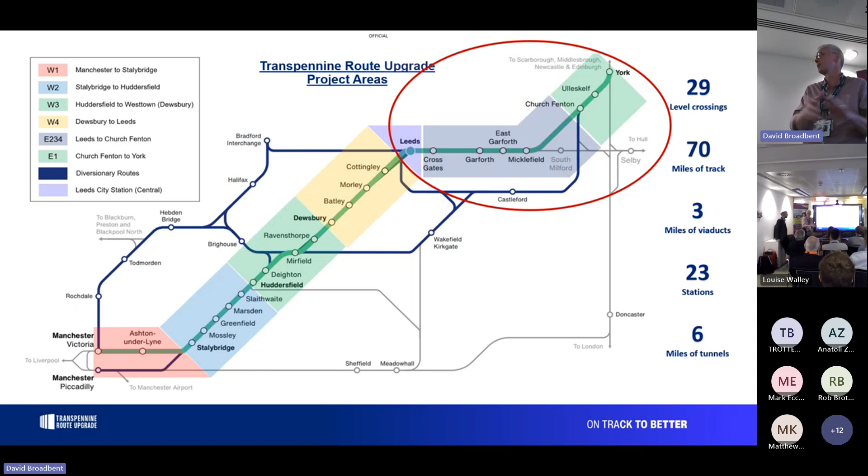So just breaking it down for us, from York we go through to Church Fenton, and we've broken that down into 4 or 5 phases. We've got the E1 scheme, which is the one we're currently on with, and it's coming to a close - basically a complete remodel from Colton Junction, full electrification all the way through to just shy of Church Fenton, and major track renewals, re-signalling, the full works of an enhancement project.

The next phase we're starting to commence, split into 3 phases, is between Church Fenton and Leeds Station itself, including a major remodel of the Neville Hill area. For those that remember, I think 1991 was probably when they did a major remodel of Leeds - a couple of people nodding. Well, that's come round again. We're going to try and remodel it and undertake an awful lot of enhancement work at Neville Hill itself.

So we've got 3 phases: E2, which is Leeds through to just beyond Neville Hill; E3, the main section, running all the way through to East Garforth; and E4 running through to Church Fenton itself. While we undertake these works over the next 4 to 5 years, we've undertaken diversionary works on the Castleford line, so on weekends we can divert trains through the Castleford area, allowing us to close the Micklefield to Leeds line most weekends, with a diversionary route in place.

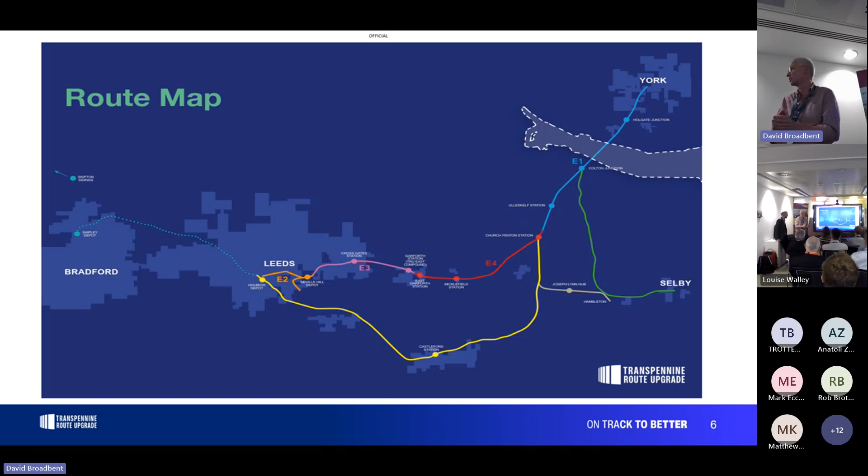Why are we doing it? We want to give more seats. We want to make it much easier for people to travel on the network. It's a difficult network to travel on at the moment, and people are experiencing that, unfortunately. We do say it's on track to better, so I don't always remember that it's on track to better when it's difficult.

More seats, trying to make it more reliable, more trains, faster journey times to get people there quicker, better station improvements. All the stations, they haven't had improvements over the past 15, 20, 30 years. So we're trying to improve the stations, make them more accessible, make it greener with full electrification, which is a key driver for the railway and for the economy as a whole. We want to become greener, get more people onto the railway so they feel safer, it's more comfortable, there's better Wi-Fi. It's what people want, and we want to put people onto the railway so they can make those journeys and get them off the roads.

I reckon if we can do this, we could save each day something like 1,000 lorry loads on the road network from a carbon perspective. So it's quite major what we want to do across the route, and it will reduce journey times by 5, 6, 7 minutes potentially overall, which I think is key for the people commuting and travelling. So there's a lot going on, and there's a lot to benefit in terms of what we're trying to do.

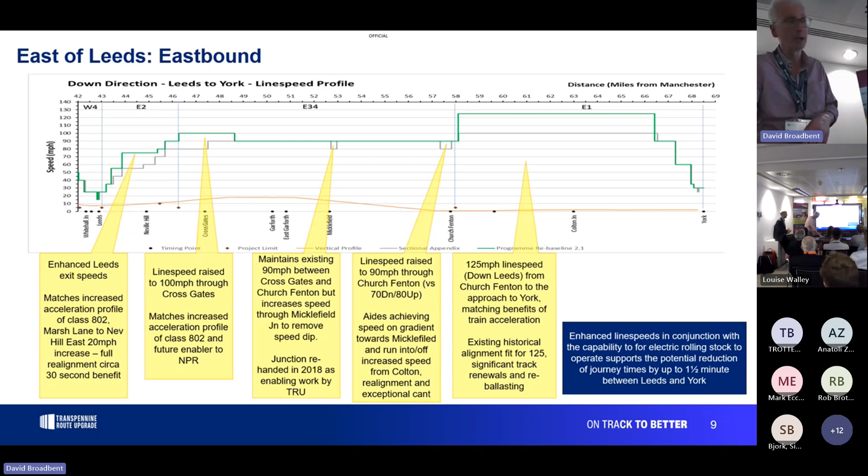From a York to Leeds perspective, there should be relatively about 2.5 to 3 minutes of improvement in journey time for us, going back the way we've been discussing. Neville Hill is a good example.

At the moment it's about 40 mile an hour. We're improving the curve at Neville Hill, we're going to move it away. For all those that have travelled there, the DB stock that's been there probably about 30 years and hasn't moved - we've managed to get rid of that, and we've got land take there, so we're moving that track about 40 metres. We're improving the curve, and we should get that line speed up to about 70 mile an hour coming through Neville Hill.

So the train is now able to accelerate coming out of Leeds as it goes towards York, where before it was quite a slow journey before it could really accelerate. Probably Crossgates and beyond before it could open up. Now coming out of Marsh Lane, we can start to open up and give the train the opportunity to start to get to line speeds.

Crossgates, etc., raising it through full renewals but maintaining 90 through. There wasn't much opportunity to go to 100 really through Church Fenton to Crossgates - increasing it through Church Fenton, and it can still open up and achieve 125 on the Church Fenton to York stretch on the down line. So quite a lot going into there, and we should see journey times improve really considerably over the next 4 or 5 years as we develop these schemes.

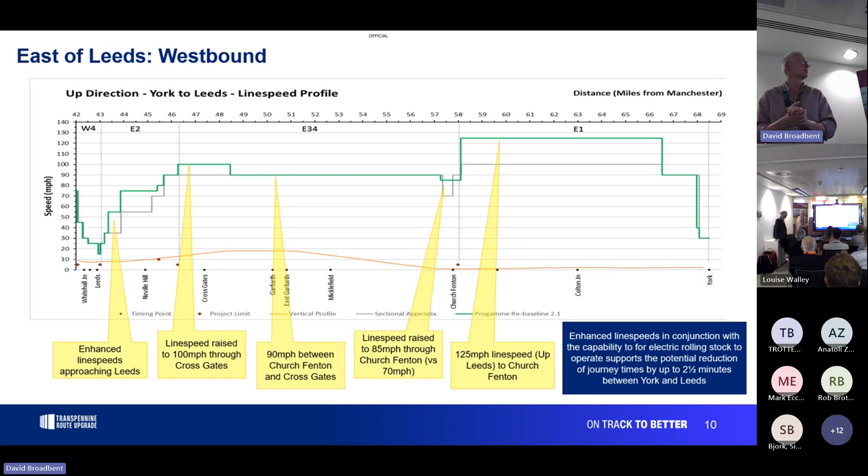And then the safety benefits of what we're trying to do - again just picking up on a few of these. We're improving, especially from a track maintenance perspective. COSS is obviously a big thing, especially going over 100 mile an hour, so a lot better, a lot more improved walkways so people can access the railway.

We're closing the level crossings between Church Fenton and Leeds. All those will be closed - we'll come on to those, and that's why it's really important. In order to do that we need the orders to do that. Still got a little issue with Cottonthorpe, but that will hopefully eventually be overcome. At the moment, all the rest of the level crossings will be closed as we deliver this scheme. They'll be replaced by new footbridges of some description, be it ramped or stepped, various things - they will be going in.

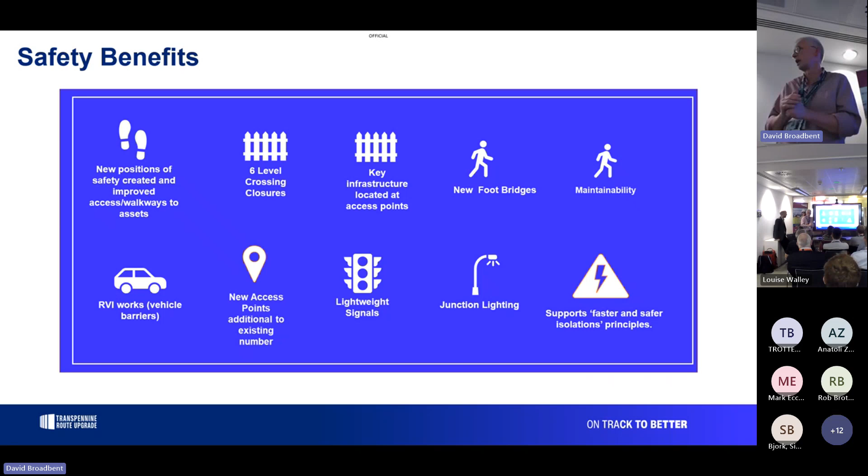How are we going to do it? So I was cautious - Mr. Ness isn't here with putting a few too many words on, but he hasn't turned up, so I'll give him a shout out as he's not here.

Got a big box plan. We've looked at this plan numerous times, replanned and replanned on this particular project. The key thing at the moment, tasked with from the DFT, is completing Church Fenton through to Crossgates by January, February 2026. That's our key milestone, and then 28 to deliver Neville Hill remodelling and through to Leeds. So an awful lot to be done over the next 24 months in getting the Church Fenton blockade done and all the key works in between from Micklefield through to Crossgates.

Access wise, we've been to and fro on 9 in 12, we're going to get 9 weeks of opportunity - weeks 4, 8 and 12 - then go back to maintenance for them to undertake the works they need to do.

There's going to be a number of major closures we'll be involved in, where we close the railway in order to do the works. Church Fenton has at least a 4-week closure at Christmas 25. We've got a number of 4-day and 9-day closures to be undertaken, and some fairly big bridges where we'll have to close for a considerable amount of time - 432, the big overbridge just by Neville Hill, the bearers on, that's getting done this Christmas.

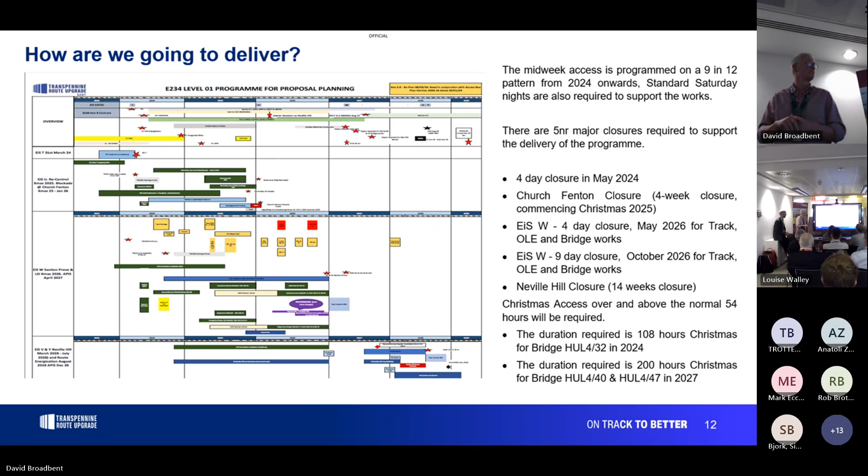Just to give you an overview of what's coming up on our scheme: this year, in a couple of weeks' time, we've got Barkston Ash. The bridge there will be demolished and we'll rebuild and put a new bridge in. We've got it cast already, it's on site - if anybody travels that way, Tadcaster Way, you can see our compound there with most of the infrastructure for that bridge already in place. That's ready to go.

We've got the TSC, which comes back to the isolation principles we're trying to achieve between Leeds Station and Neville Hill depot, where we can put the TSC in. That'll get commissioned, allowing us to independently feed Neville Hill, meaning we can take longer isolations - probably another hour and a half, 2 hours, where we don't have to wait for the last train off before we can turn everything off. It'll give the industry a major benefit, not having to wait for Neville Hill to be fully clear of everything into its depot off the line.

E1, hopefully we're going to be fully energising. We've got some final works at Colton, then we can get that up and running and energised, and commence track works. We've got some major Cat 11 and Cat 15 works to be undertaken this coming year. We've got Osmondthorpe Bridge, the one with the 432, that's this Christmas, and we've got to finish off the tangential wiring at Colton as well. So there's quite a lot of key milestones we need to achieve this year as an alliance, as a group.

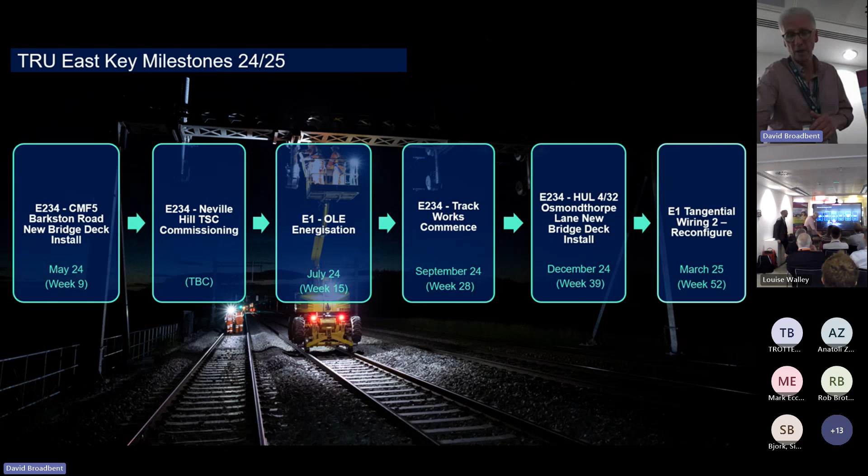Use some of the volumes - just to give an overview of the volumes, those are sorts of volumes we'll need to do. We've got 3 major culverts, 2,500 kilometres of either re-railing, single rail or 2-track rail full renewals, 1,500 metres of Cat renewals there, Cat 11, a number of major renewal weekends - 27 of them - and 28,000 metres of troughing this year. So there's quite a lot of works just this year, and this is ramping up as we complete E1 into E2, 3, 4. A phenomenal amount of work to be undertaken.

Just to give an overview, to complete the works post 25, there's still an awful lot to do: 5 blockades, 50 odd track kilometres of electrification, and a number of under bridges and over bridges, 36 S&Cs mainly as we do Neville Hill in 28 - all that S&C gets renewed. So yeah, it's a lot to do.

That brings me on to Andrew, really. We've got all that work, future work, work ongoing at the moment. But the only way we can do that is by having the land available. And any of you will know, if you want to do major works, we need the land. The only way now we can get the land is going down the road of orders. Some of it you can do negotiation for short term, but for anything major, major schemes, we've got to use the orders - this is where they're really critical to us. So I'll hand you over to Andrew.

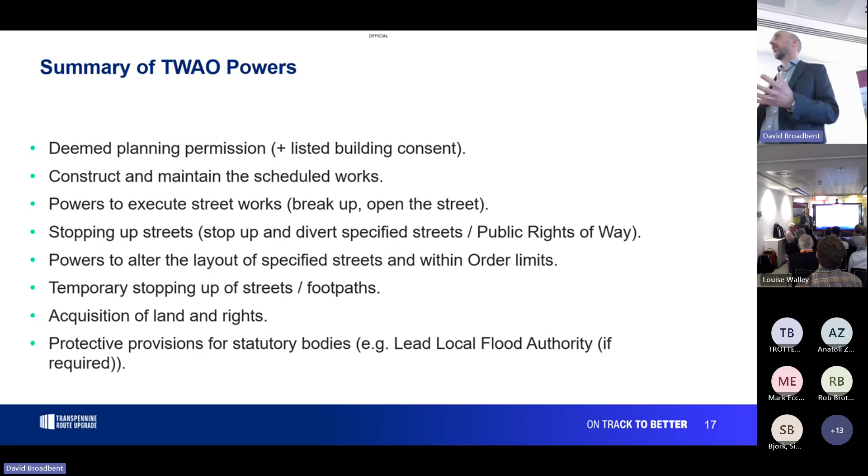And with that brings a range of benefits. Those benefits include full powers to construct, maintain and operate the railway. It means we don't need any additional powers for the elements we include in the order - it gives us all the powers we need to do what is included. Following on from that, it gives us certainty that we can use these powers and go ahead and deliver.

Importantly, it's a single decision - the order is delivered via a decision by the Secretary of State. So it's a single decision at a national level rather than multiple decisions at local level, a very important distinction from business as usual. That can lead to programme savings, cost savings, efficiency savings, around management of risk, that kind of thing.

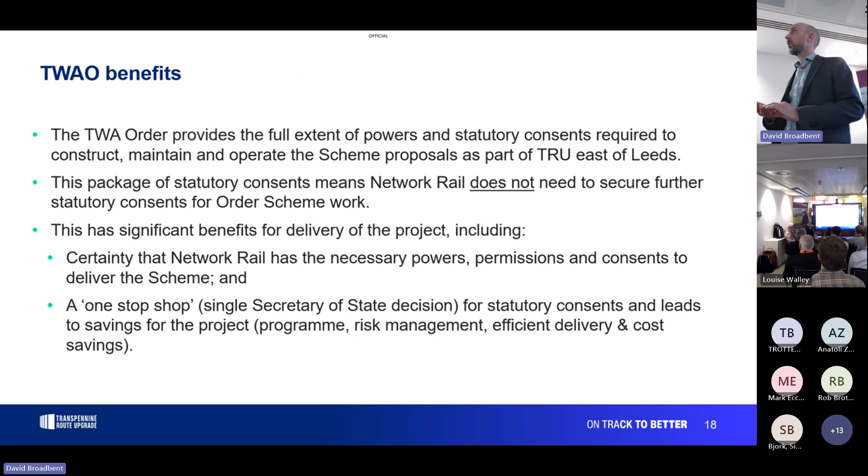So that's a bit of an overview on the Transport and Works Act order process. What I'm going to do next, for TRU east of Leeds, we require two orders, and I'm just going to run through the scope of those in turn. The first is the Church Fenton level crossing reduction order, and the second is the Leeds to Micklefield enhancement order.

So the Network Rail Church Fenton level crossing reduction order does what it says on the tin. To start off with, on programme, we made the application for the order in July 2022. We had a public inquiry in August 2023 - that's quite a long gap, and there were some problems, not of our making, in terms of how long it took to determine the need for an inquiry and to get to that inquiry.

But happily, once we had the inquiry, there was a very quick period between the inquiry and the Secretary of State's decision, which was in November 2023. That's very quick between inquiry and decision, and the order is now made and in force - a legal instrument that's been in force as of April this year.

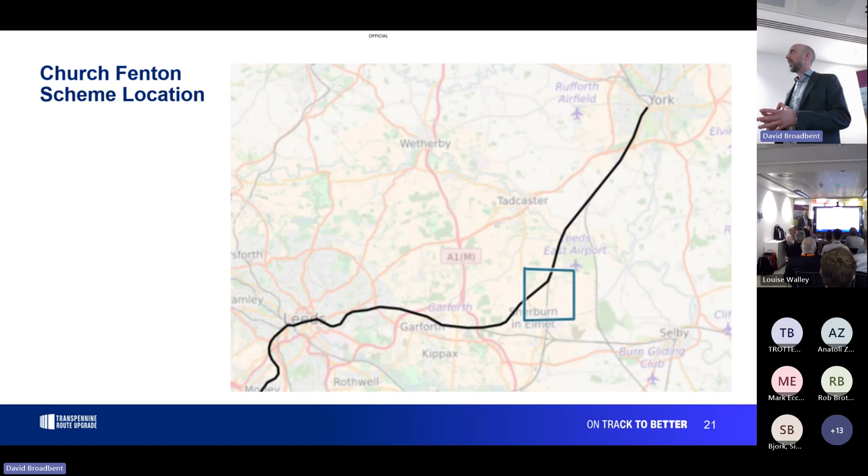Where is it? Church Fenton - so pretty much in the middle of the route between Leeds and York.

What I'm trying to show on this slide is the problem we were trying to solve with the order. So you've got the railway lines, the CFM line and the NOC line. In this location you've got a number of properties called Rose Lane Cottages, landlocked between the two railway lines, accessed via a level crossing at Rose Lane. There are also two more private level crossings providing access to agricultural land to the south of the railway line. As part of TRU, we need to close those level crossings, so obviously we need to provide an alternative access over the railway. That's basically the problem we're trying to solve with the Transport and Works Act order.

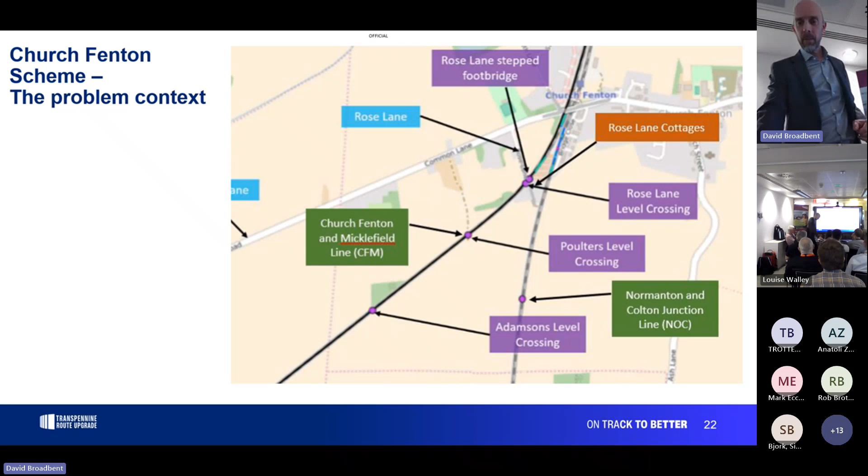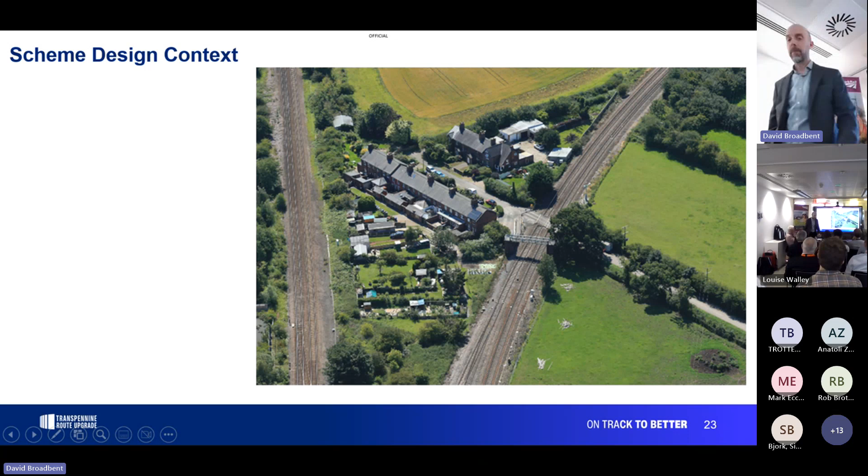It's probably worth emphasising on this particular one - it's one of the most dangerous in the country, and Network Rail has to provide 24/7 attendance at this level crossing, so it's costing NR a fortune. This is why it's important that this one gets closed as quickly as possible and as safely as possible.

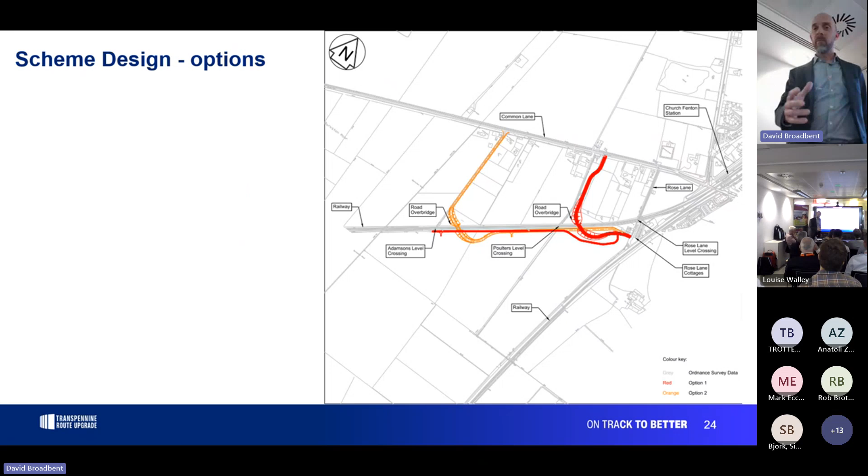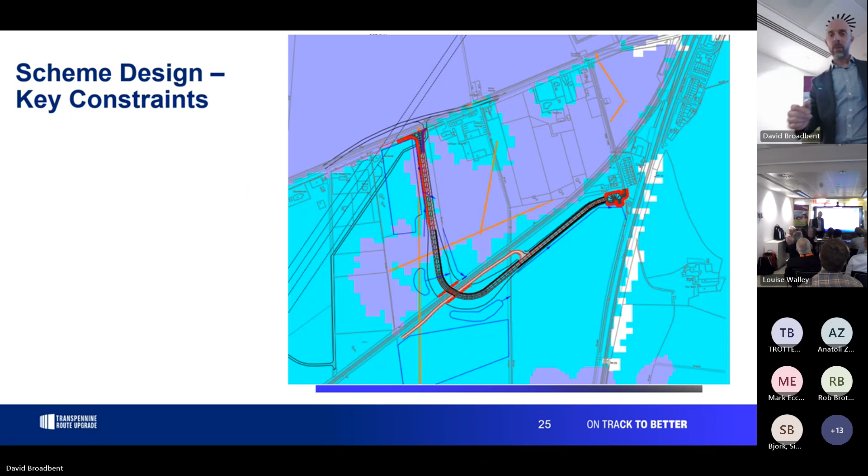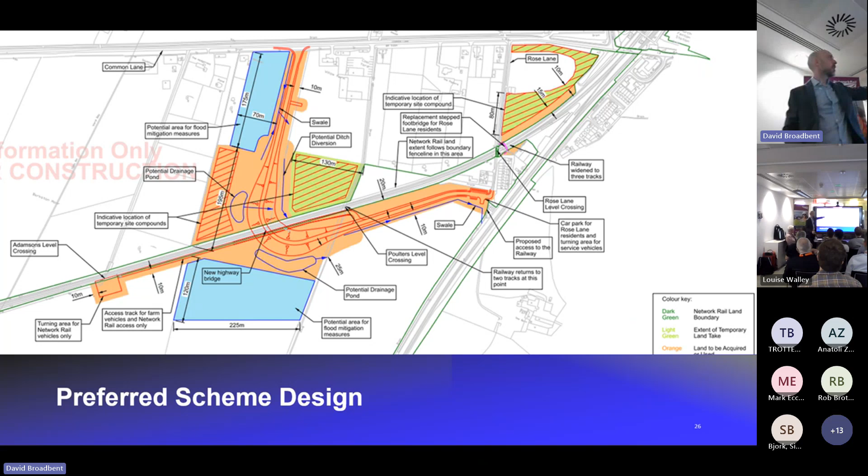This slide shows really what we ended up with - this is the scheme design that we submitted as part of the Transport and Works Act order. The main reason for showing this is to illustrate, going back to what I was saying about the powers the order gives us. This shows the extent of land we needed control over to deliver these works. The Network Rail land boundary on this plan is shown in green, very tight to the railway corridor, a typical setup. We needed permanent land to build the road, the embankment and a car park, some permanent land for a third line, and then temporary land for construction and also for flood mitigation measures. It's quite an extent of land needed to deliver this, and bringing this together without the order would have required negotiation, ransom situations, all that kind of stuff. So that's a good illustration of what the order gives us in this particular situation.

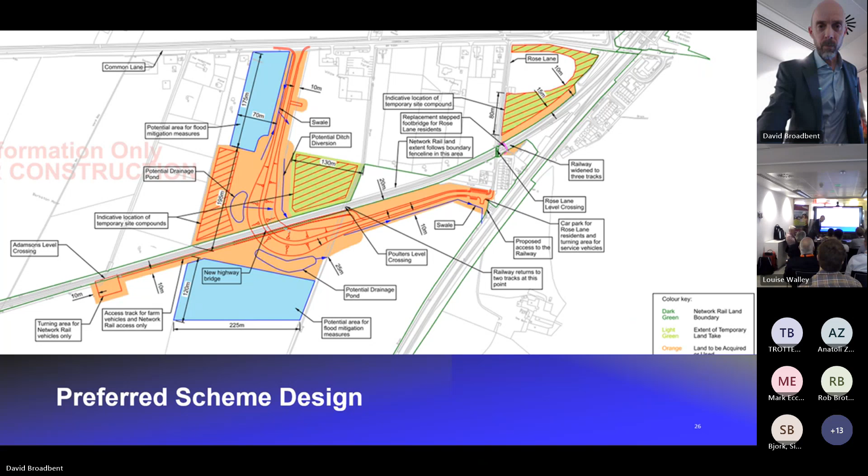There are just a few visualizations here to give a bit of a better understanding. Forgive the tower blocks - there are no tower blocks in the west of Church Fenton, the artist got a bit carried away there. But you can see the design - you've got the road, the access from Common Lane, the bridge, and the car park.

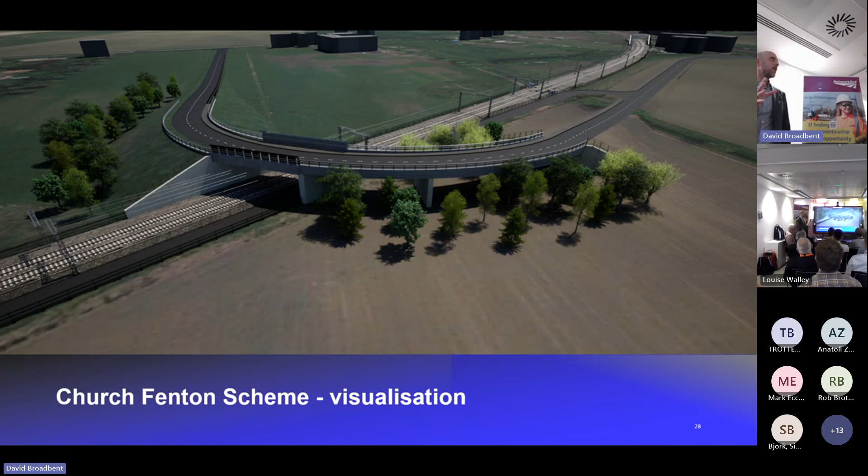I just put this on because it illustrates the point about flood risk. So you'll notice that north of the railway, the road is on an embankment. South of the railway, it's on piers and an embankment.

That's because if you remember that flood zone 3 drawing, the flood zone 3 is here. With flood modelling, what happens is the flood water accumulates over here, coming from the northeast direction, and in the worst case scenario it bumps up against the railway line, eventually floods over the railway line and moves south.

And if we had this as an embankment, that flood water would flow down the embankment and flood the Rose Lane properties. So the concrete piers allow the flood water to come through in that worst case event. That's part of the design process that we went through.

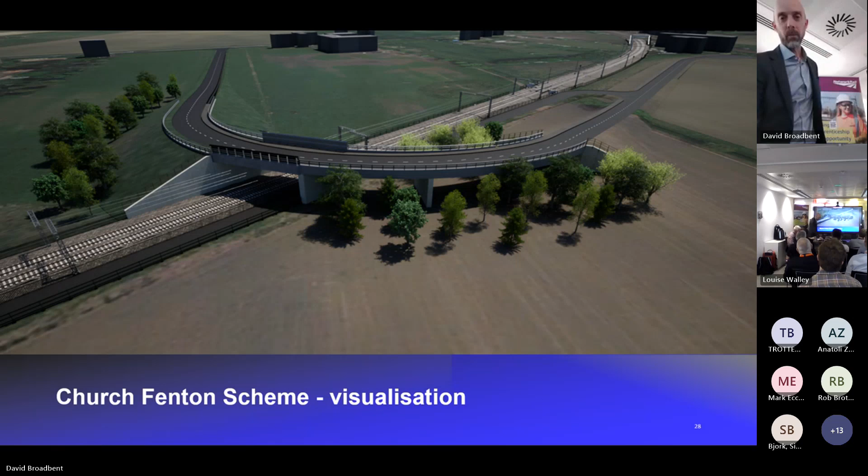And that's just another impression of what this should look like with a bit of landscape planting.

So just to conclude, on Church Fenton the main components are the works construction - these are the order components, the powers to construct the works. So the highway access from the public highway, the bridge, a new footbridge, new farm access tracks, and some flood mitigation.

Permanent land acquisition to deliver the works, temporary land acquisition for construction, extinguishment of the private level crossing rights, which is important, various works on the public highway to do bits and pieces, and also there's an overhead line across the site, so we've got powers to divert that as well.

And a few success points with this project. We carried out several stages of statutory and public consultation. There was a really good level of local engagement with that, and a broad level of support for the scheme. There are obvious benefits, particularly to the people who live on Rose Lane, of having a brand new access road to where they live. So that was well received.

Crucially, we had support from the Environment Agency on the flood mitigation, flood risk management strategy and design that I've talked about. That helped to get rid of a potential objector, a potential statutory objector. So that's really important. We ended up with only one objector at the public inquiry, and probably consequently a very short period between the close of the inquiry and the Secretary of State decision in November.

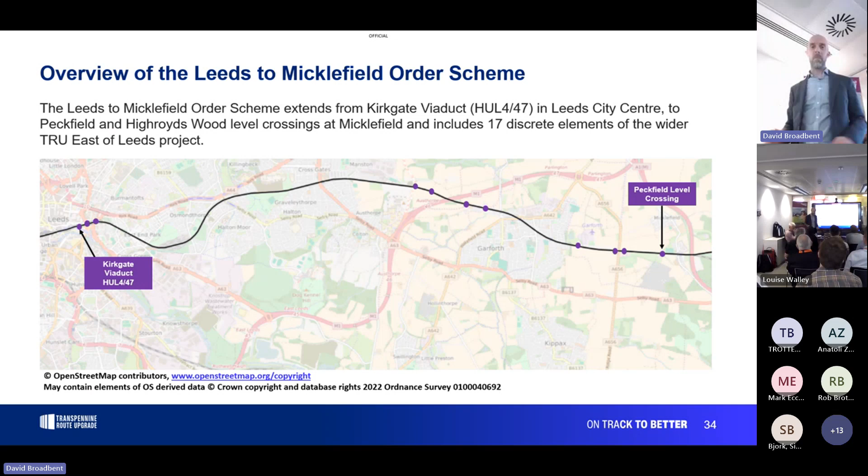This order is very different to the Church Fenton order in that it's a multi-site, multi-element order. There are 17 separate elements in this order, and it stretches from the Kirkgate Viaduct in central Leeds all the way out to the Peckfield and Highroyds Wood level crossings in Micklefield. So 17 different elements, a broad area of work, which make things a bit complicated.

There's a bit of a rider on this one. So the following slides are very outline in terms of what the order includes, and I've also missed out a number of compounds because they're not very interesting, basically. There are a number of just land-only compound elements to make sure we could get compounds to get on and do the work on the road. So I've not included those, generally speaking.

So what I'm going to do, I'll rush through this a little bit. If there's anything later on, just ask me. But going from Leeds to York, I'll just go through the main elements that we've included in the order. I think I might have skipped one.

Okay, there's a couple that are missing here that I thought were in there, but that's fine. So the ones that are missing, there's...

There's land at Kirkgate Bridge and land at Marsh Lane Bridge. So essentially, we are taking Kirkgate Bridge in central Leeds and Marsh Lane Bridge out and putting new bridges back in. In the order, there are bits of land around the bridges to make sure we can get at those bridges and do those works. The actual bridge works are not included in the order. We're getting consent separately with Leeds City Council. Kirkgate's done.

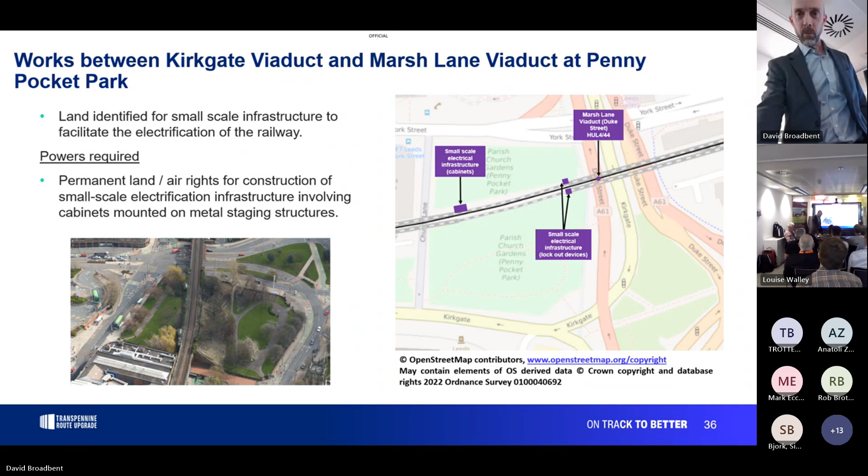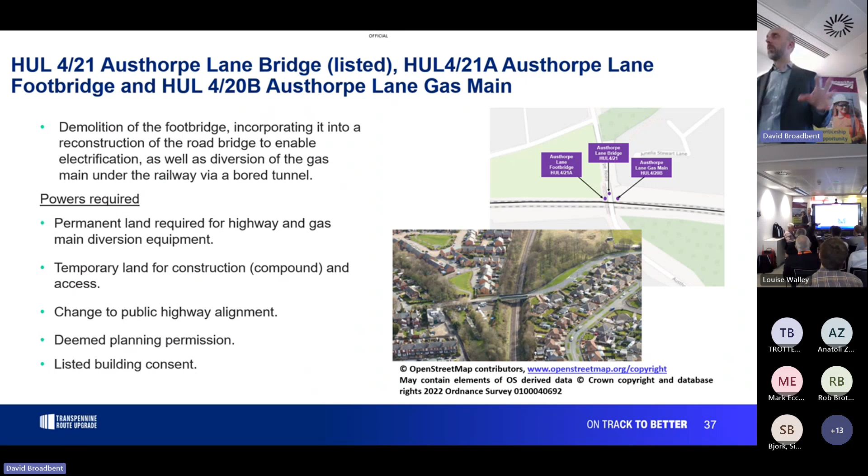Crawshaw Woods Bridge, HUL 4/20, another listed bridge. It's different to Austhorpe Lane in its style, and I'll show you that later. But again, it has to come down, it's too low for electrification. We're partly demolishing and reconstructing that bridge. Again, a range of powers similar to what we are seeking at Austhorpe Lane. This carries a public right of way across it, so the powers include stopping that up temporarily and tweaking it slightly.

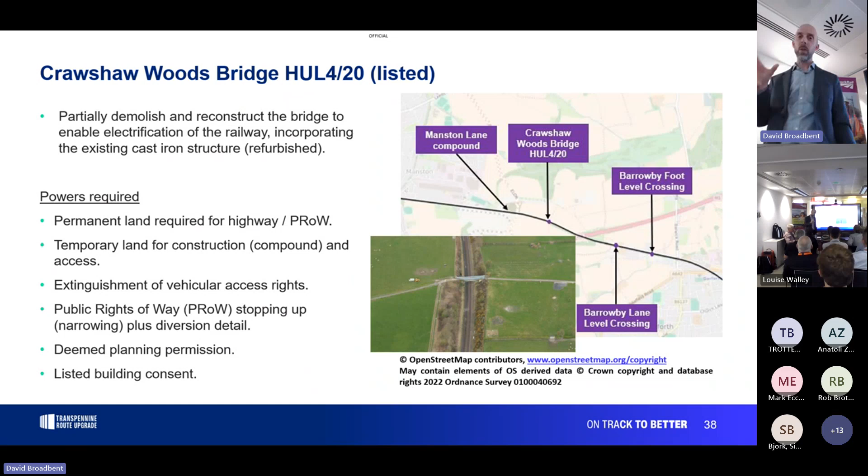Barrowby Foot and Barrowby Lane level crossings. There are 5 level crossings on this section of the route that we are including in the order, and the powers are to close those level crossings and to provide an alternative solution to access across the railway, and it varies in different locations.

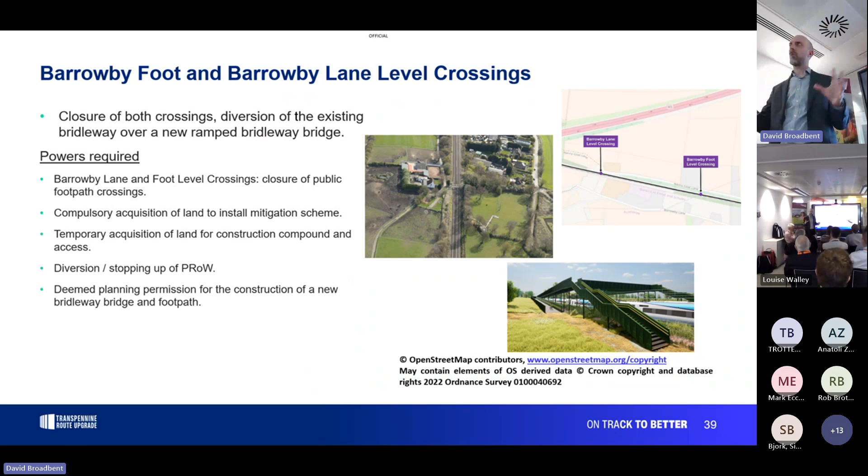Barrowby Foot and Barrowby Lane are the first 2 going from Leeds to York. In this location, we're going to be putting a bridleway bridge in. Barrowby Lane carries a bridleway over the railway line, so we're going to be building a new bridleway bridge - an image of what it will look like. Quite a wide range of powers needed here, including closure of the public footpath crossings, compulsory acquisition of the land to actually put the bridge in, temporary acquisition of land and diversion of the public right of way and so on. So quite a broad range of powers affecting land outside Network Rail control again.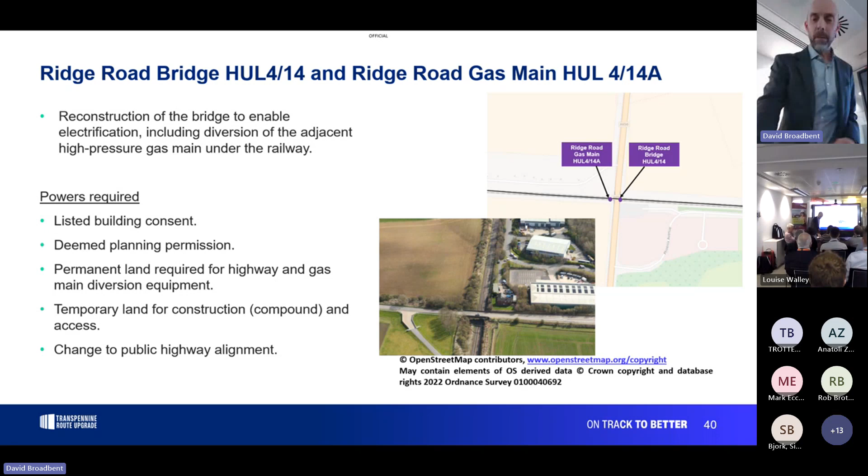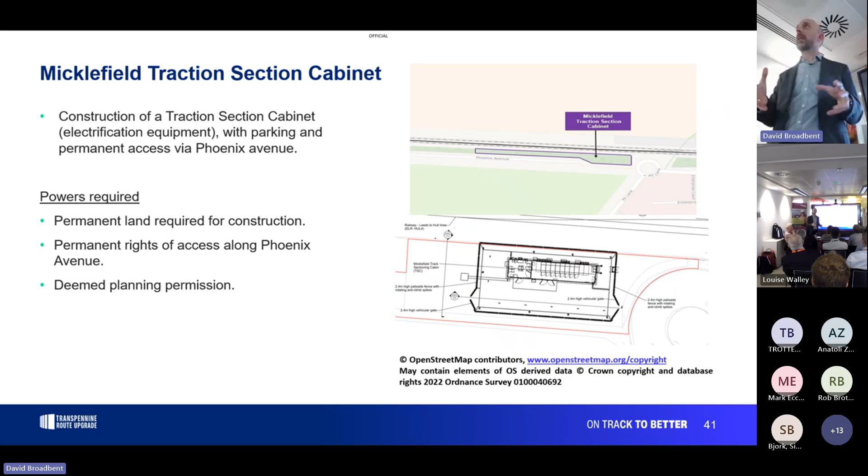Micklefield traction section cabinet - this is a good example of it. It's a very minor bit of work, but because we couldn't find anywhere to put the traction section cabinet in Network Rail's land, to make sure we could put it where we need to within a very tightly defined geographical area to serve, we included land in the order to make sure we could do that.

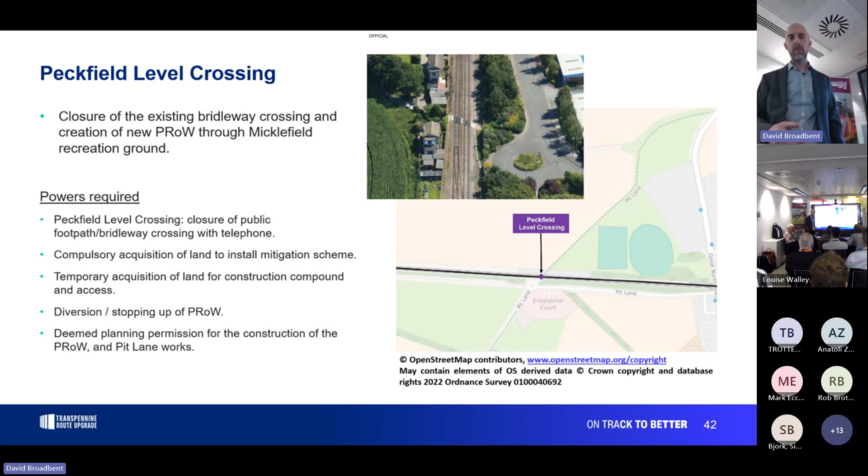So a few words on a few topic areas. First of all, environment. Quite often people think transport works out on a big project means environmental impact assessment, lots of work, lots of problems and so on. Not the case on the Leeds to Micklefield order.

In order to determine the need for environmental impact assessment, we do something called a screening opinion with the City Council and with TIPU, that's the Transport Infrastructure Planning Unit of DFT. We actually asked them, do we need an environmental impact assessment for this work? And they said, no, we don't. Even though we're knocking listed bridges down, we didn't need EIA.

What we did do was produce an environmental report to go with the Transport Works Act order. That just helped to give Leeds City Council, who is the relevant local authority, the assurance that they knew what we were doing, they knew what the environmental effects are, and they have some control over those where appropriate. So we did do an environmental report, but it's not as big and complex as an EIA. And we have an environmental agreement signed with Leeds City Council to manage those environmental effects.

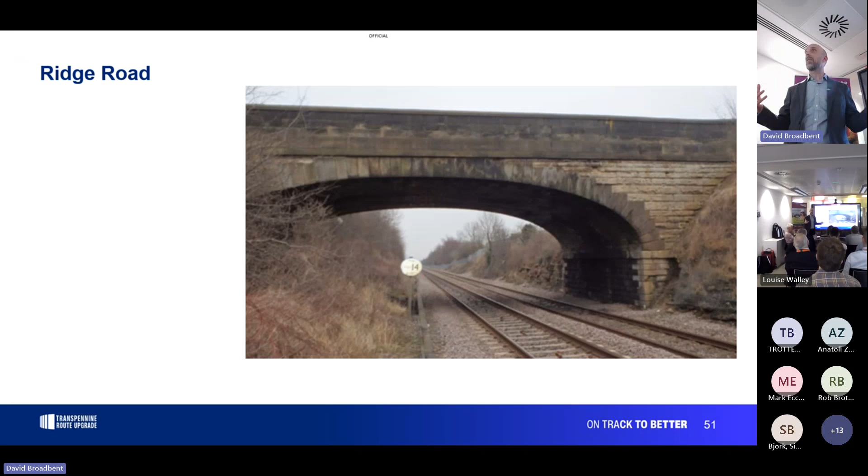That's Brady Farm, that's Ridge Road. So 3 of the bridges are of this design, called a basket arch design. It was designed by Walker and Burges and constructed in the 1830s. They're quite an important historic feature as a group of bridges on an active railway. It's uncommon, and they're listed partly because of their design. You can see how similar they are - the geometry is very similar.

This slide gives you an idea of design development. We spent a lot of time talking to Historic England, which is the statutory body responsible for listed heritage designations. We started off and said we want to do this, and they said no, we don't like that. Perhaps understandably, this is a flat, fairly basic, standard flat deck steel bridge with stonework facing. They said it doesn't really reflect heritage, but we don't like it.

So we went away and did some more work. We had two alternatives in terms of alternative design. That was one - I can't remember the technical terminology for it. But that was one option we presented, and that was the other option, and they liked that. Hopefully you can see if you look at the geometry, this is intended to be weathering steel ribs underneath the bridge, and the idea is that it reflects the geometry of the original bridges. I apologise, it's not a great image, but hopefully you can see it.

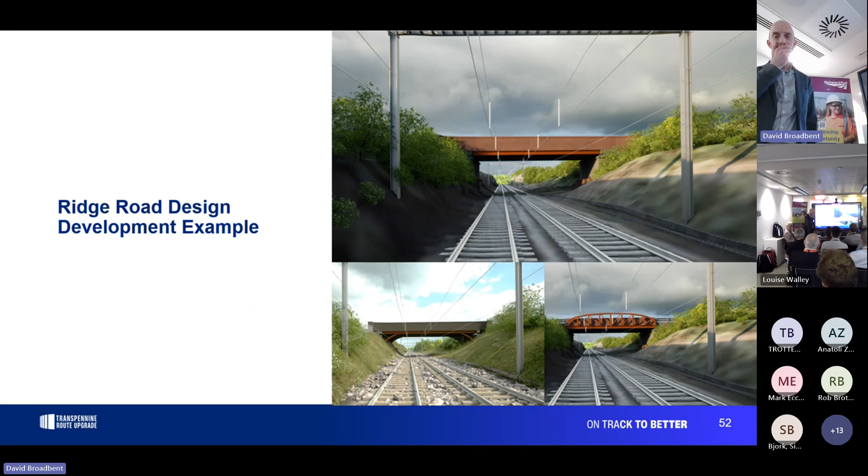I think this is the last slide. I'm not sure how we're doing - we're doing okay, or just about.